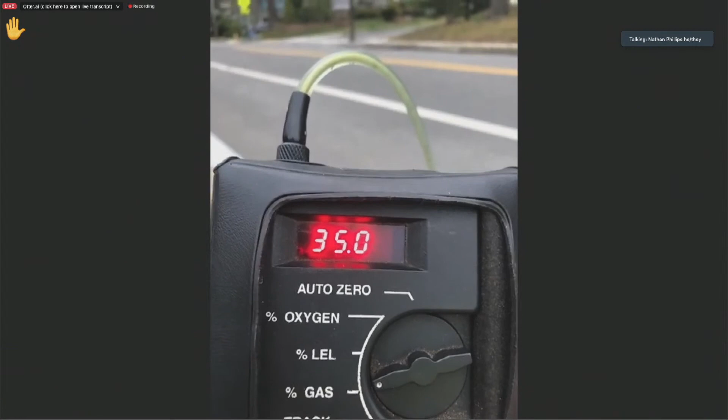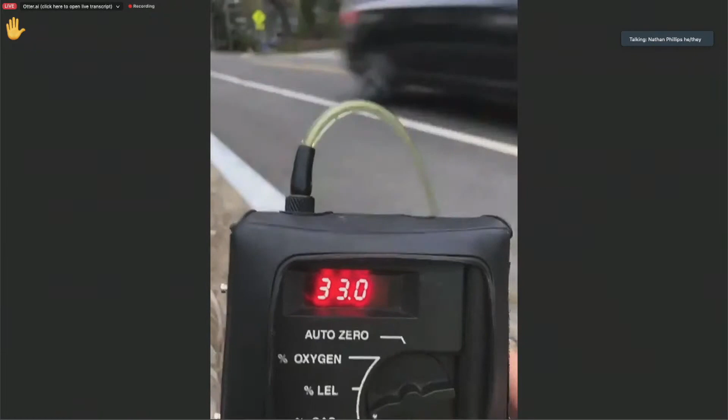So this remains a dangerous situation, and I think the priority must be on addressing a situation like this. I'm calling for a DPU investigation of the Walnut Street gas explosion, and I think our priorities need to be on safety rather than these lower priority areas that are being asked for.

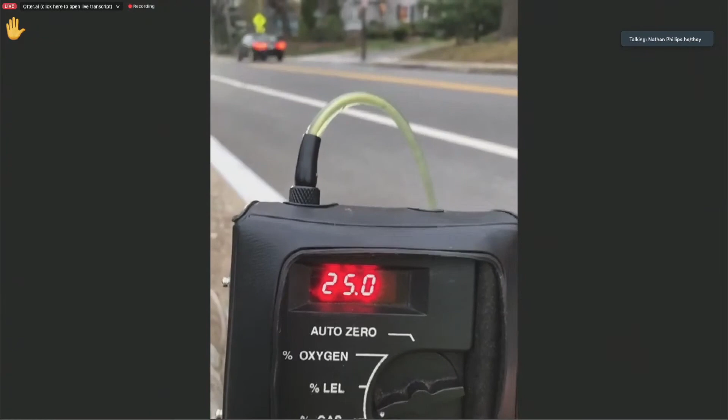Thank you very much for your comments, Mr. Phillips. I agree that Walnut Street has been a real problem. I've been out there myself several times, including with you, and there's still a lot of gas leaking out there. I am concerned about it. But right now we have a different grant of location in front of us. I have called the emergency line about Walnut Street, and when I was bicycling around today, I did see another NGrid van on site there. But thank you very much.

Yeah, and just so you know, I'm going to call this leak in right now. Okay, thank you very much. Is there any other member of the public that would like to speak?

I think we're all talked out on these grants of location. Okay, this is in Ward 8. I guess I would see if there's a motion.

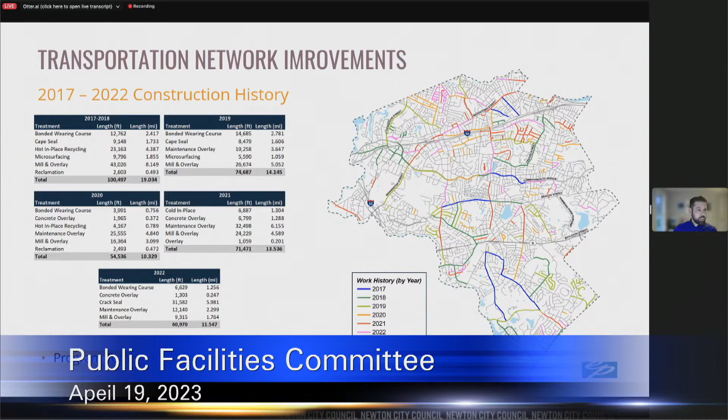In terms of the sidewalks and curb ramps, I included this history here as well. As you might remember, anytime we do any minor or major rehabilitation to a roadway, we make sure the sidewalks and curb ramps are accessible as part of that process. So far in the program, last year was a little bit of a shorter year in terms of how many sidewalk and curb ramps got done, but that tends to fluctuate year by year depending on what projects are up next for the program.

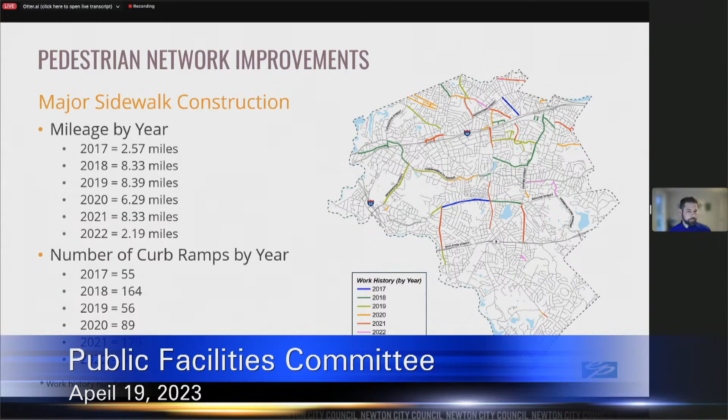Next I want to talk about something we touched on briefly at last year's update—an update on where we're at with the pedestrian infrastructure network and the inventory we recently completed. As we introduced last year, we were in the process of completing this. Mike Jasset, a city worker who helped complete the majority of this work with some training—hats off to him—spent a lot of time on the sidewalks and curb ramps in Newton collecting this information. It was all collected utilizing an existing system the city has obtained, their asset management software through People GIS.

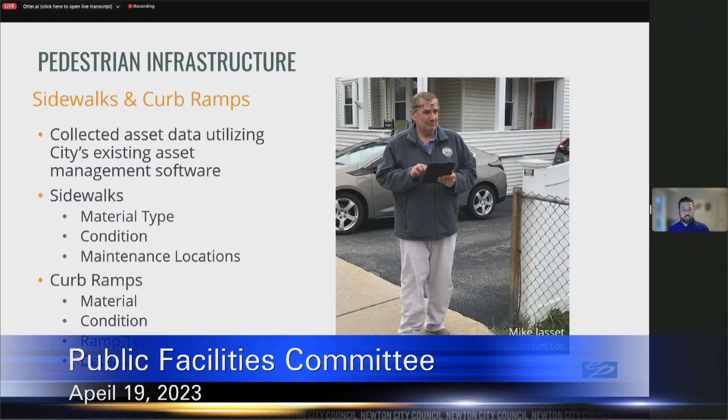Mike, with very little training and guidance, was able to collect sidewalk data including material type, condition, and maintenance locations needed to be performed. He also performed a full curb ramp inventory, collecting material type, condition of each curb ramp, the ramp type, and whether or not ramps had detectable warning panels, as that's part of ADA and AAB compliance.

He rated each of the sidewalk segments, generally broken up from intersection to intersection, using general categories: excellent, good, fair, poor, and replace. You can see some examples of those on the right-hand side of the screen.

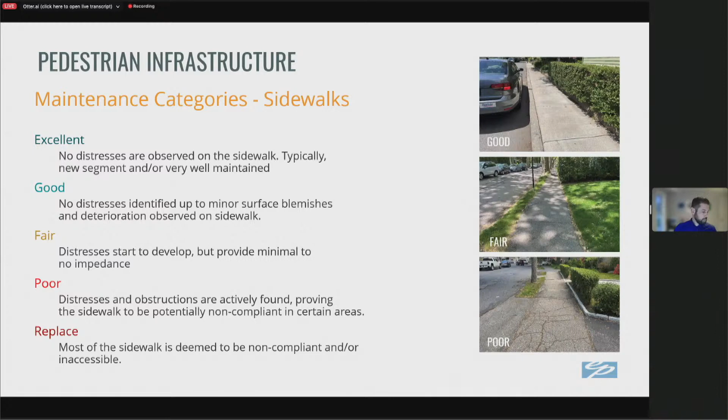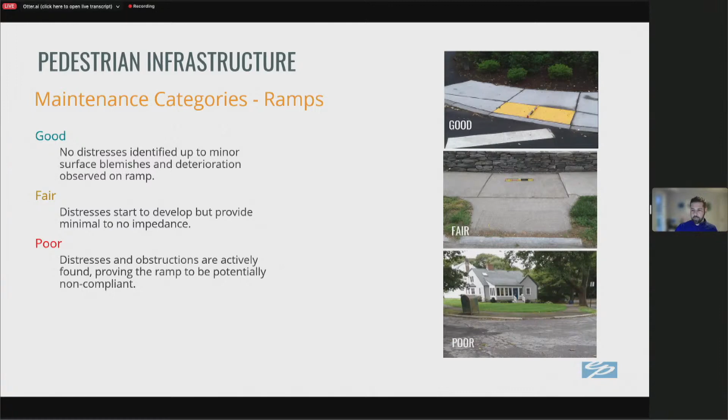We did the same thing for the curb ramps. It's a little bit different in terms of how we rate those, but it's generally on a good, fair, poor rating system for general condition.

In terms of what was collected and what the final evaluation shows, there are approximately 420 miles of sidewalk infrastructure that were mapped, and he collected that information in that rating system.

41% of the sidewalk network was found to be in excellent or good condition, 48% was in fair condition, and 11% was in poor condition. Just to give you a guide, the city's road miles total 287 miles, so there's actually quite a bit more sidewalk miles than roadway in the city, just because there's sidewalk on many of the roadways on both sides of the road.

In terms of the curb ramp inventory, he collected information on 5,200 curb ramps. This is a substantial network of sidewalks and curb ramps. Similar to the sidewalk rating, they were found to be in excellent or good condition 57% of the time, fair condition 39%, and poor condition 4%.

We also identified where potential new ramps could be added. The guidance we gave Mike when doing this inventory was to look at where sidewalks hit intersections where there was no ramp or ramp opening to access the sidewalk.

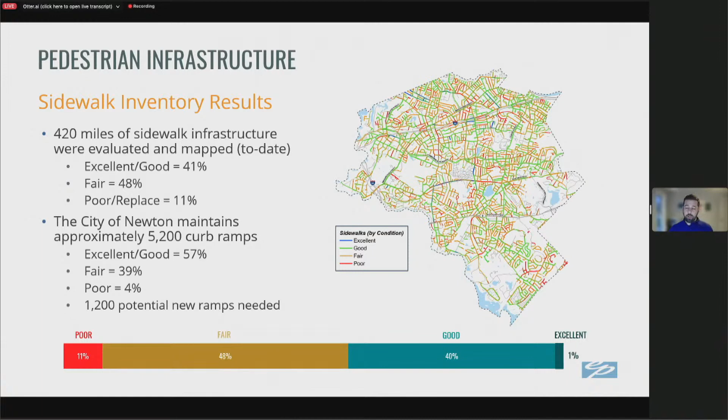In terms of moving forward on sidewalks and curb ramps, I wanted to talk about prioritization. For those of you who were on the call last year, you might remember those beautiful heat maps showing where pedestrian activity is. We're going to continue using those in the prioritization.

We're hearing loud and clear that one of the priorities in the city is around schools and the safety around schools and being able to access schools. You can see on the right-hand side here, we've created buffer maps around each of the schools. I'll show more detail about what that allows us to do moving forward in terms of prioritizing and understanding what type of work needs to be done on each school.

We also use roadway classification, since they're major connection points on minor and major arterial roadways and collectors compared to local roadways. So we're going to use that in terms of prioritization.

We're also looking at the Safe Routes to School mapping that the city currently has, specifically the previously established plow routes for sidewalks, prioritizing those as main walking points as they were identified as part of the Safe Routes to School initiative.

And obviously we're going to use a lot of the data collected by Mike in the assessment—condition data, whether or not a sidewalk or curb ramp is in compliance—and utilize those heat maps as well.

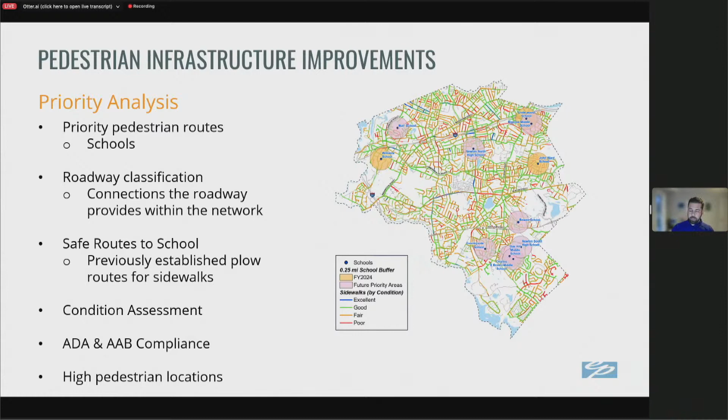With that, I'm going to show you an example of 3 of the schools. These schools were actually on the city's capital plan: Ward School, Underwood School, and Williams School.

What we did was draw buffer maps around the school—I believe they're quarter-mile buffers around each school. That gives us an understanding of where the most likely pedestrian activity is going to happen due to the school itself, logically where people are likely walking to and from school.

We have each of those for each of these schools right now. The red is the condition in terms of being in poor condition within these buffers. Yellow is sidewalk segments found to be in fair condition, and the greens are the ones in good condition. Again, we have this for both the sidewalk and the curb ramps.

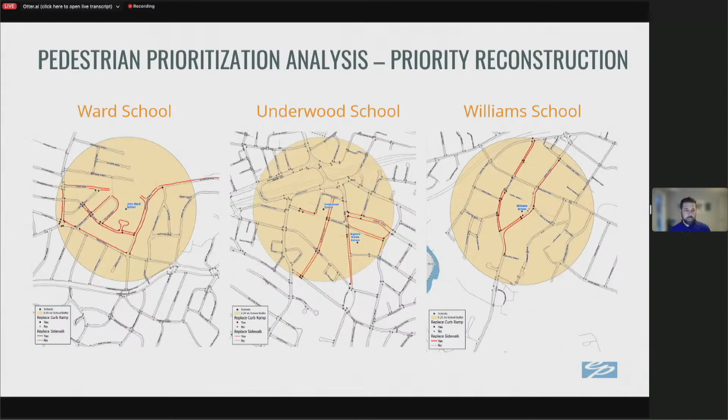Next, I'm going to give a high-level overview of where we're at with the roadway network as well. I'll be happy to go back to any of these slides or graphics if anybody has specific questions. I know many of you on this call have seen the roadway network presentation a couple times, so we brought this back a bit and added in some of the sidewalk information, to not make it too lengthy.

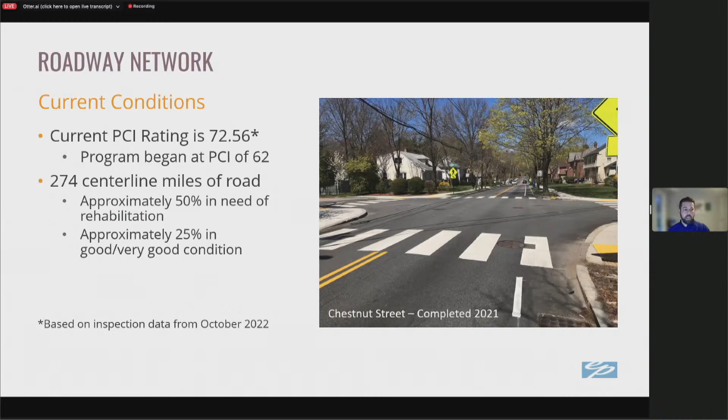The overall current PCI on the road network is 72.56. The program began, I believe, right around 62, so we're continuing to make progress there. All of the numbers I'm showing you today are based on the inspections we did this past season in October of 2022. Again, 274 centerline miles of roadway, approximately 50% are still in need of some sort of rehabilitation, and approximately 25% of the road network is actually in good or very good condition.

Just to remind everybody, the yearly process we go through doesn't just look at roadway conditions. We look at a number of different things that need to be done to each of these roadways. First, we look at the budget and distribute how much money should be allocated toward each of the different treatments, and we try to put a specific number into each category based on the roadway ratings.

Then we look at the existing conditions themselves. We take a look at the Complete Streets initiatives, does a particular street need sidewalks or ADA accessibility or bike accommodations? We look at the community needs and what needs to be done there. We also have that data-driven analysis that guides us to where we should be looking and getting the most benefit for the money we're spending. That's the cost-benefit value, a very valuable tool for us in prioritizing which roads to tackle first.

And then what always throws us for a loop every year is all the underground infrastructure and what comes up there. So we make sure the water system is in good shape, that any repairs are made ahead of time with sewer, and also other utility upgrades that are underground. We typically start this process with a kind of master list that we go off of on a yearly basis, but we usually start checking the following year's roadways for utility or Complete Streets needs in late summer, early fall of the year before construction.

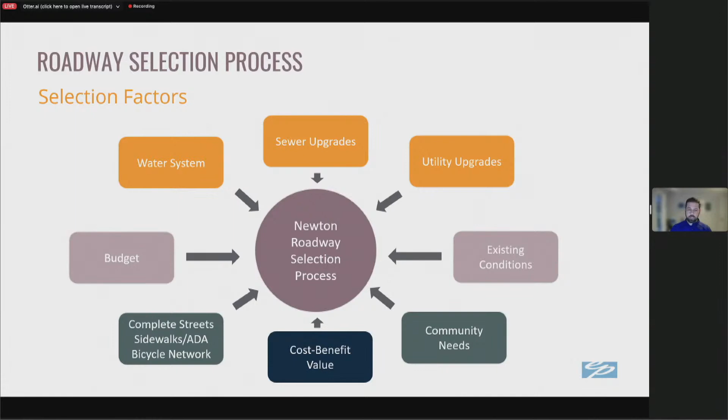That typically takes us a couple months to get through, to be able to vet all those out and make sure that we're clear to do that work in the following construction season. So in terms of the work planned for 2023, I broke this up into 3 or 4 different slides so that we can explain it.

As I like to say every year, this is a living document. Some of the underground utility work pops up as part of the planning process, and some streets can get pushed forward. That's usually the reason we have to push a street from a planned year to a future year. But we actually track that on a yearly basis to make sure we're keeping those roads on the list, even if they have to slide to the following year.

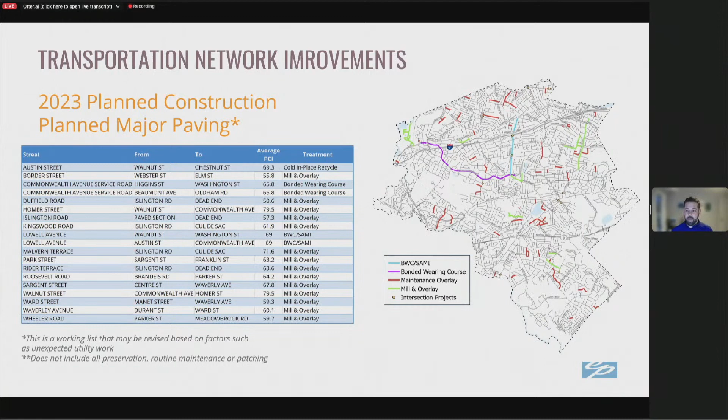The second category here is pretty substantial this year compared to past years. It's the maintenance overlays, looking at roadways that are in poor condition and making sure we're doing a curb-to-curb overlay. That's the red you see on the map on the right-hand side. Pretty substantial program this year.

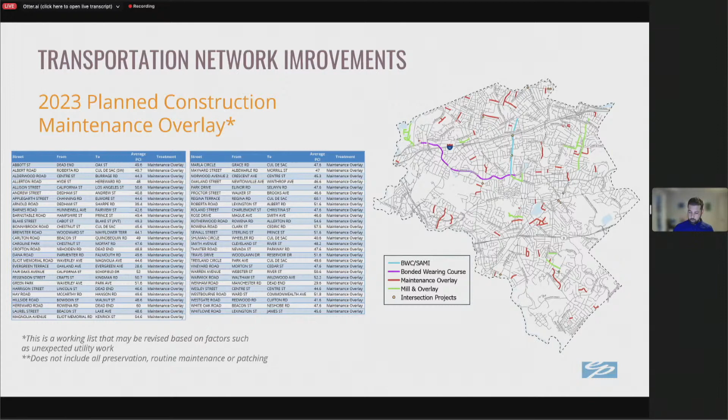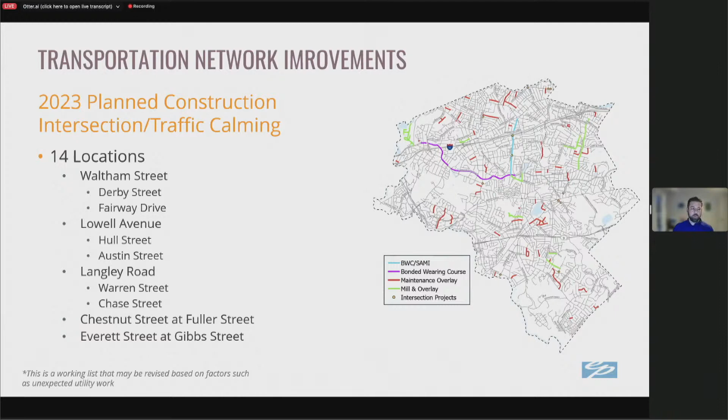And then the traffic calming locations — I listed just a few of the intersections we're planning to tackle this year. Not going to read through all of them, but it's there for your review and consumption.

In terms of an overview of what the program looks like this year, we're planning to do a lot of work, which is always a good thing, but also a challenge. It comes with its own challenges. We're looking at approximately 17 miles of roadway just off the list I provided, and usually on a year-over-year basis, crack sealing adds a substantial amount as well.

We can anticipate that this mileage is probably going to go up by somewhere between 5 and 8 miles once we add in the crack sealing, and we'll also be adding in some other preservation treatments. So it'll be a very busy year in the city, along with everything else going on, but it's good to see this program continuing to thrive and make progress.

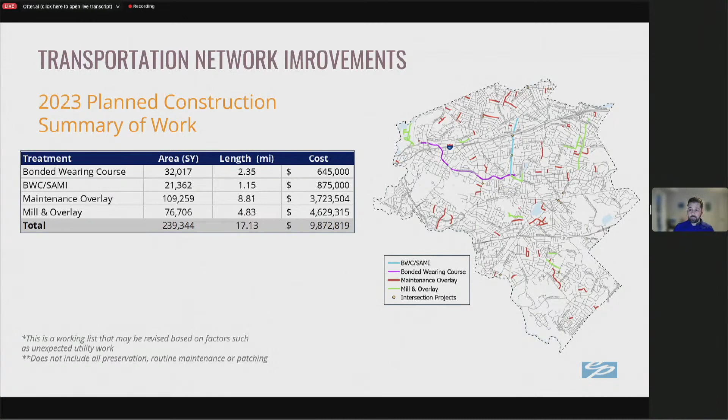The next steps — I add this every year — we're going to continue to update the database with the construction history. We just did pavement inspections last year, which we've been doing on an every-other-year cycle. This allows us to easily identify the candidates for preservation and really preserve the roadways that are in good shape so they don't fall into disrepair quickly, prolonging the life of the road network.

On a yearly basis we're going through and doing our updates of the database. We're revising our capital plan based on those different criteria I showed earlier, looking at putting out new bids and making sure we're staying current on our bids when we need to, and making sure we're getting competitive prices here in the city. I think we've done a good job of that.

This year was a substantial year for putting out new bid documents because they were not able to be renewed and they really needed to be refreshed. And then we're doing our yearly construction, making sure we're doing our QA/QC on the construction, and then we kind of go through that same cycle again.

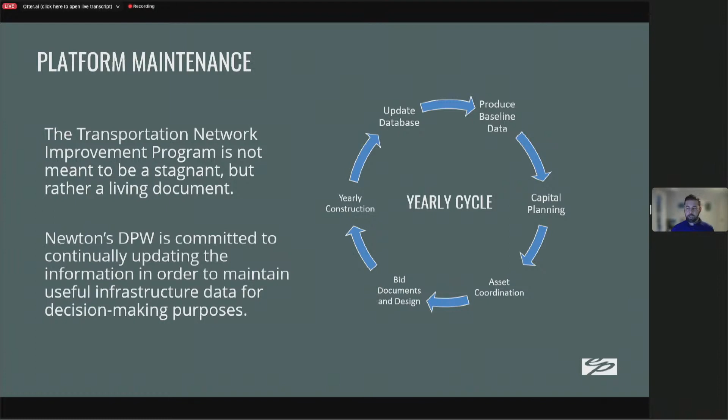It's been great to see the progress in the city. I think everybody that drives, especially the main roads in the city, can see that we're really starting to make some significant progress. Now we're starting to peck away at a lot of those neighborhood roads to make sure those are getting the treatments they deserve as well. So with that, I'll take any questions, and I can pop up the presentation at any point to go back to any slides if anybody has questions.

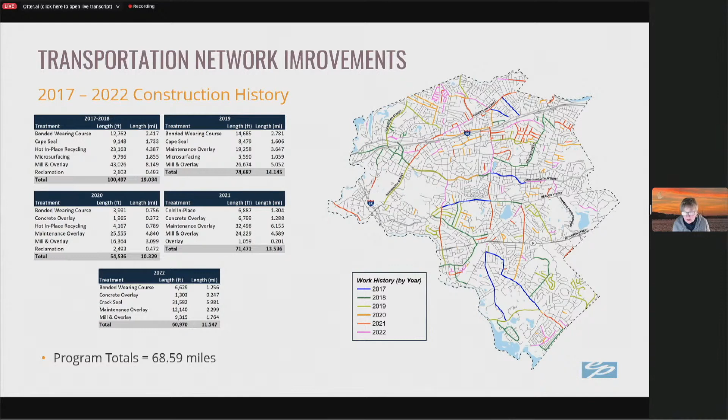I do have a sidewalk question, which I'm really pleased to see your assessment and prioritization of sidewalks. Makes a whole lot of sense to do the roads close to the schools first. Everybody here has probably noticed there's a difference in concrete colors on our sidewalks - I'm not talking about the bituminous, I'm talking about concrete with aggregate. Sometimes on some streets it's a patchwork, going from almost white to dark gray and back again, different aggregates and so forth. I understand it's possible to control that to a degree if we had a standard for the mix we were using. I wonder if you could comment on that, because it looks like, concrete then bituminous then concrete then bituminous, you get a white patch and a gray patch and a different color gray patch. I wonder if you have an approach to that, because it looks like you're going to be doing lots of little pieces of sidewalk.

Yes, thank you, Councilor. We are, and unfortunately that's really unavoidable. Unless we replace all of the concrete, it does fade, and it fades at different rates if it's in the sun more. We have a strict specification for the concrete we use - when we bid the concrete, it has to meet that specification, and we do test it on occasion to ensure it meets that spec. But if you're not replacing all the concrete in kind at the same time, you will have that difference in coloration.

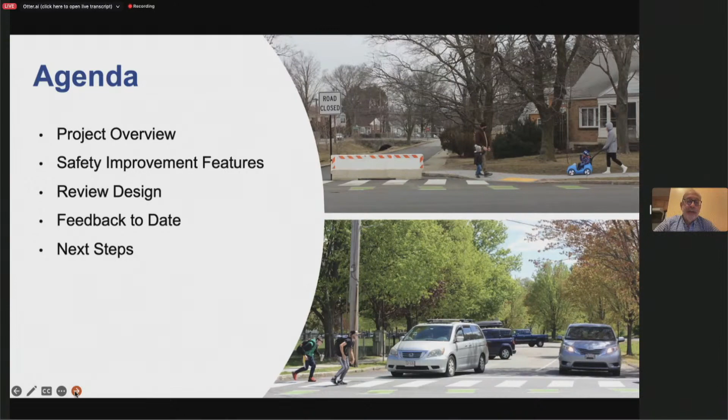Tonight we'll be talking about an overview of the project, some of the important safety features, reviewing the design, discussing the feedback we received to date, particularly over the past few weeks, and some next steps for this project. This is founded on Newton in Motion, the vision from our transportation plan, which prioritizes safety, smart, using data, accessibility for all, livable, to enhance the quality of life in the city, and sustainable, recognizing the importance of transportation to addressing climate change.

The city, as was just discussed, embraces complete streets to make sure that they work for all users. Safety is the highest priority, embodied in our aggressive grant programs for safe routes to school. Equity, so that we all have good, safe access to our roadway network. Transportation is a determinant of public health, so that's critical to how we approach policies, as well as being consistent with our climate action plan.

Central to our view of transportation planning is to moderate speeds on Newton's roads. The faster people drive, the less response time they have, and the less survivable any collision with a pedestrian or bicyclist or people in another vehicle. So we're always looking for ways to get people to drive more safely in our village centers, in our neighborhoods, and on our arterial roads.

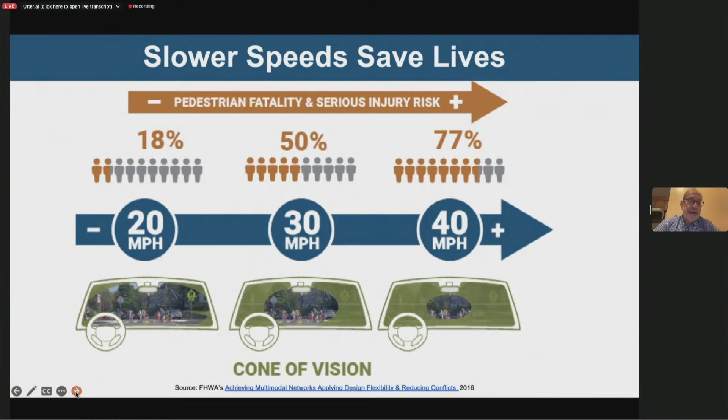This project is focused on Albemarle Road and Brookside Ave, between Washington Street and the Charles River. It is intended as a short-term pilot. There's no permanent construction planned. We're using rubber, paint, and plastic.

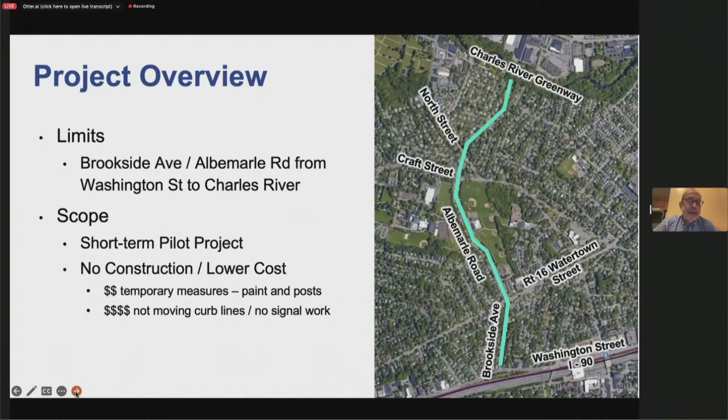These are temporary measures consistent with the state grant program through which it is funding. It would be far more costly than the $200,000 we received from MassDOT if we were moving curb lines or including signals. But we will be talking about signalization of a problematic intersection, just to inform the committee and the council.

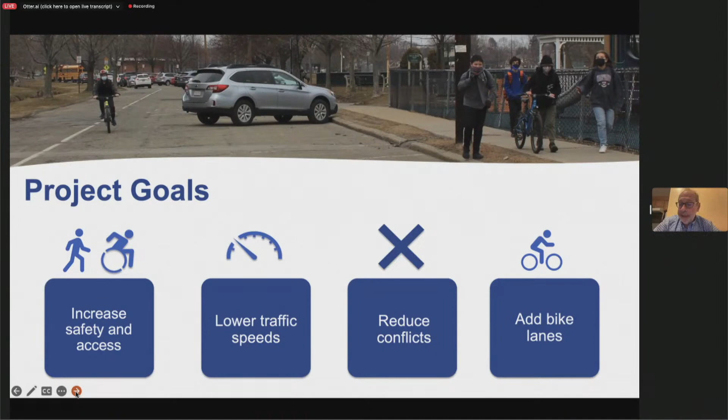Consistent with our strategy, we want to increase safety and accessibility, reduce speeds, reduce traffic conflicts, and provide facilities for cyclists and pedestrians.

To review the history of this project, a couple of years ago we developed conceptual designs. There was a public meeting in March 2022. We applied for a MassDOT Shared Streets and Spaces grant, which the council accepted last June. We've been undergoing engineering, design, and a public process through the winter and into the spring, and we hope with council's approval to have installation in August of this year.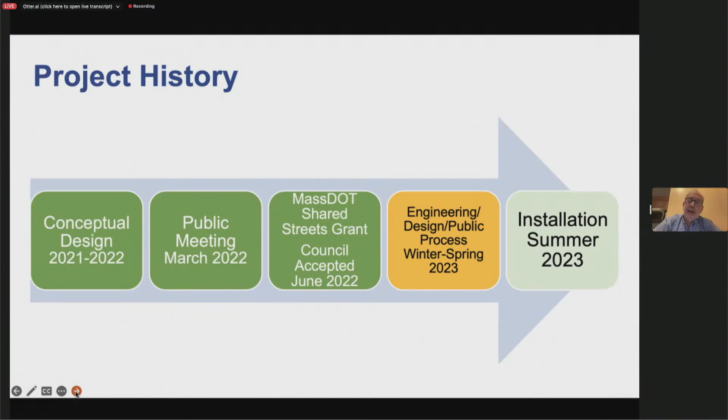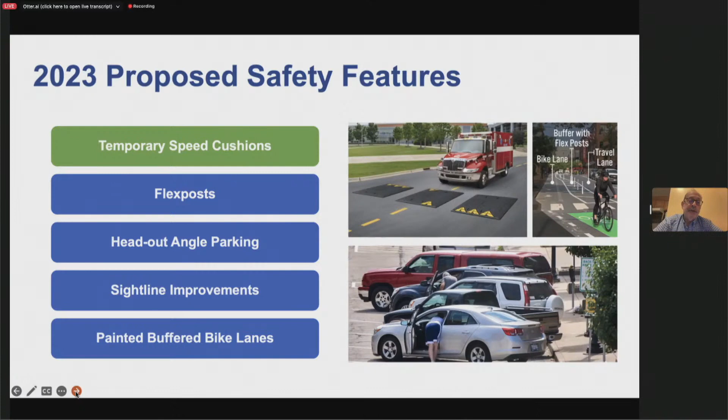The key safety features are temporary speed cushions, which, consistent with the docket item, is technically within your jurisdiction, but we're looking for your blessing for the entirety of this temporary project. Other features include flex posts, head-out angle parking - we'll talk more about that - improvements to sight lines so motorists have better visibility of other roadway users, and painted and buffered bike lanes.

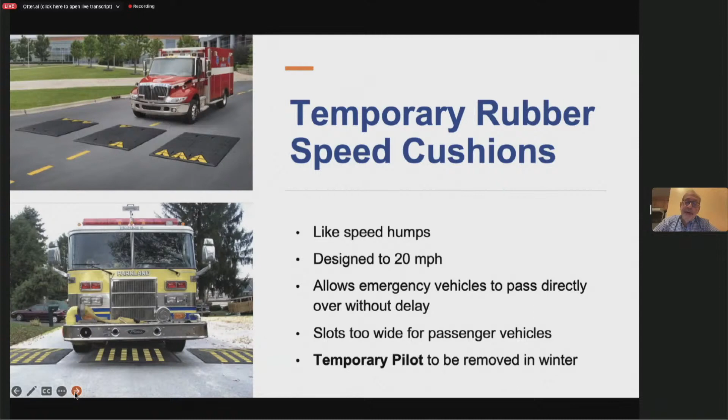The use of these temporary rubber speed cushions - they're similar to speed humps designed to 20-mile-an-hour speeds. They allow emergency vehicles to pass right over them. The slots are too wide for most passenger vehicles, and these are intended as a temporary pilot, installed about 9 months out of the year, similar to what we've done on Grant Avenue.

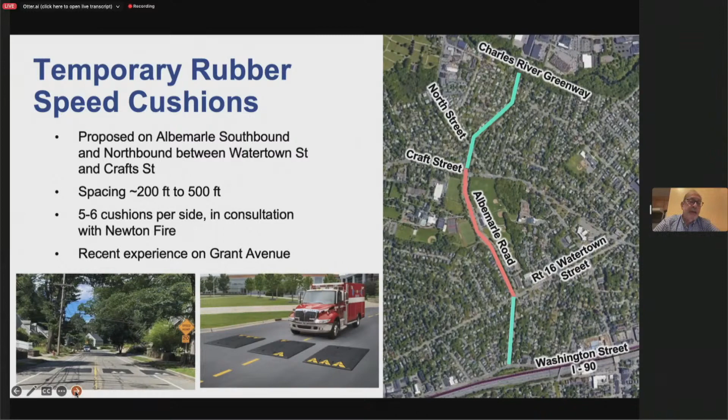They're proposed just for the middle section of this project, northbound and southbound between Watertown and Crafts, every 200 to 500 feet apart, prioritized right before crossings, about 5 or 6 cushions per side. We would be doing this in consultation with the Newton Fire Department and learning from our recent experience on Grant Avenue. This is an overhead view of the approximate locations we anticipate these being.

We may move some of them - they can make a noise when vehicles go over them. So we may remove the ones in front of houses on the bottom right of the screen on the southbound side of Albemarle. But this is just to give you a sense of what we have in mind.

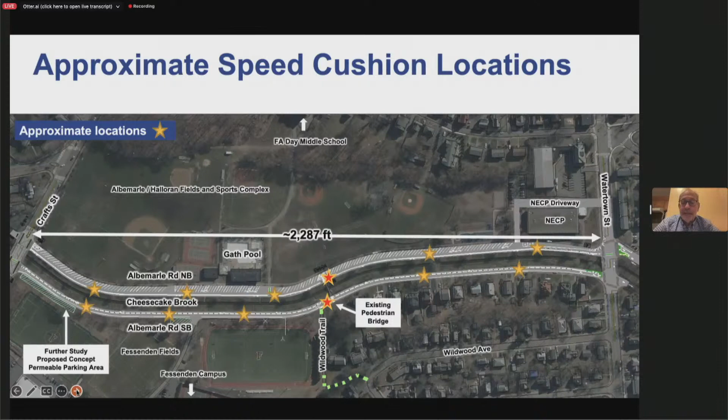Really the goal is when people are traveling on this road, we want them to be going slowly and be more mindful and prepared for particularly kids, but others in the roadway that would be crossing or riding alongside them.

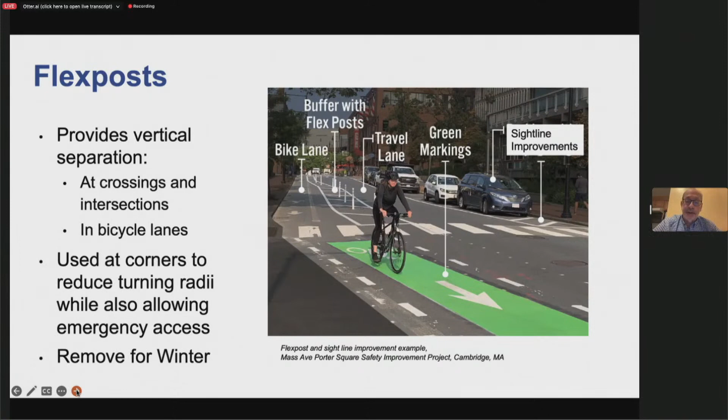Flex posts provide vertical elements that we would be installing at crossings and intersections to separate bicycle lanes and to use at corners to help reduce the turning radii. They also allow emergency vehicle access, and those will also be taken up for the winter. This illustration gives you a sense of how they're installed, but I'm sure everyone in the meeting is familiar with these elements that have been sprouting all over the region in the past few years.

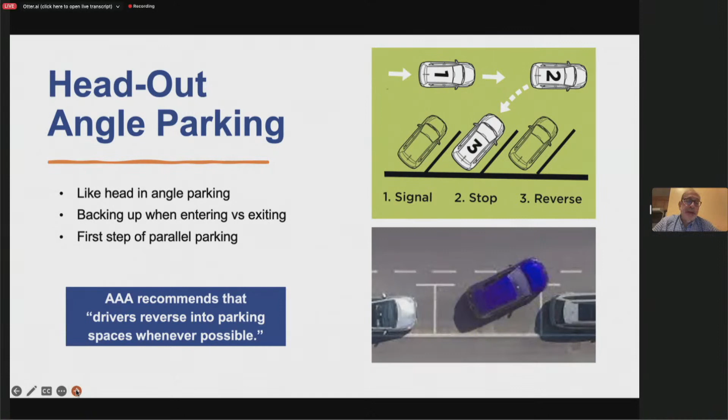The next element is head-out angle parking, which is angle parking similar to head-in, but you would back up when you're entering versus exiting. It's the first maneuver we all make when we're doing parallel parking. AAA recommends that drivers reverse into parking spaces whenever possible, and they also recommend head-out angle parking.

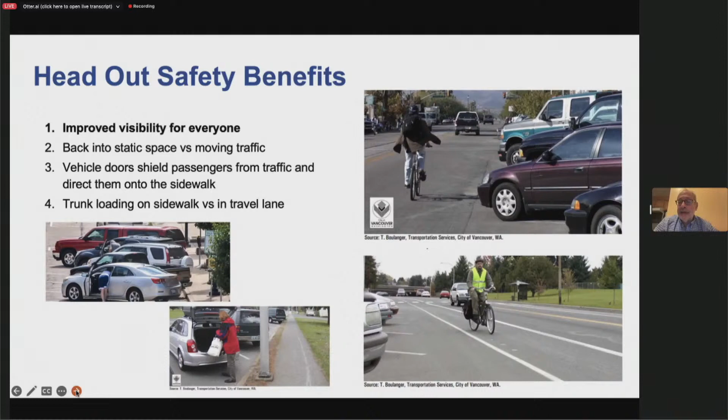The benefits of this are primarily greater visibility - you're backing up into a space versus into moving traffic. The doors shield passengers from traffic, and you can trunk load onto the sidewalk versus into a travel lane. It maintains the space efficiency of head-in angle parking, but provides important safety benefits.

Not to say Newton is the same as Tucson, Arizona, but they used to have one car and bike crash per week, and after they changed to head-out parking, they had no crashes in 4 years.

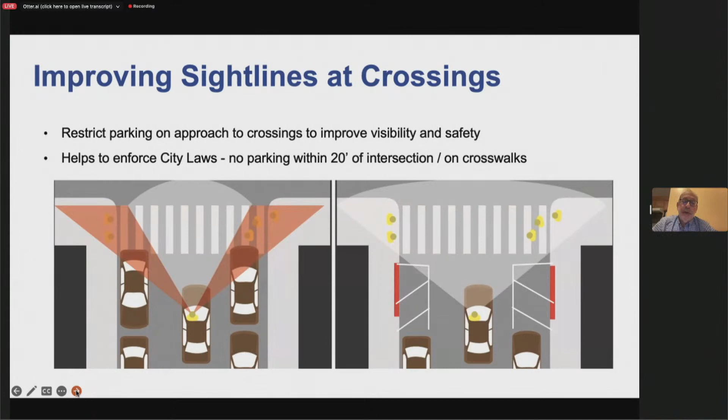The next element is to improve sightlines. Right now we have parking, notwithstanding the ordinance that prohibits parking within 20 feet of an intersection - we have parking right up against crosswalks and closer to intersections. So we want to remove that to provide greater visibility.

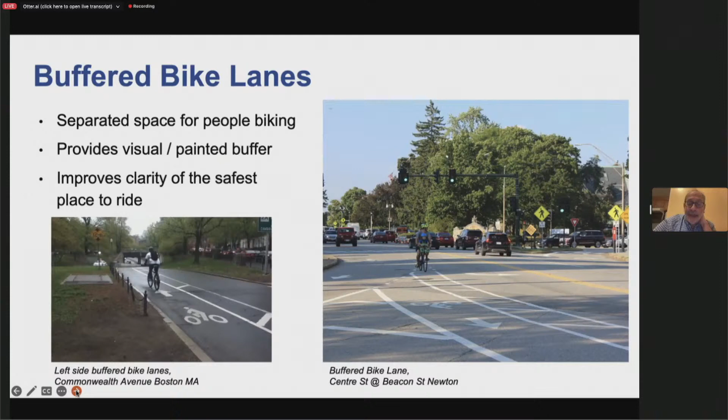Lastly, buffered bike lanes. There's sometimes some questions about terminology, but a buffered bike lane or separated bike lane means that you have just some pavement, usually demarcated with paint or thermoplastic, to separate the motor vehicle lane from the bicycle lane. That's what we're proposing for most of this project on Albemarle. It's a visual and painted buffer that gives more clarity for the safest place to ride. In a perfect world with more dimensions, we'd be looking at protected bike lanes, but there's not currently enough width to do that on Albemarle.

A slightly different approach is proposed on Brookside Avenue. We're thinking of this as a neighborhood greenway with relatively low traffic volumes. We'd have improvements at Washington Street, slowing turns with flex posts and paint at Albemarle, which comes in from the side and stops on the northbound side in terms of its name, then resumes again heading north past Watertown Street. There would also be a contraflow bike lane, so for that short section of a few hundred feet on Brookside, it would be one way for drivers and two way for cyclists.

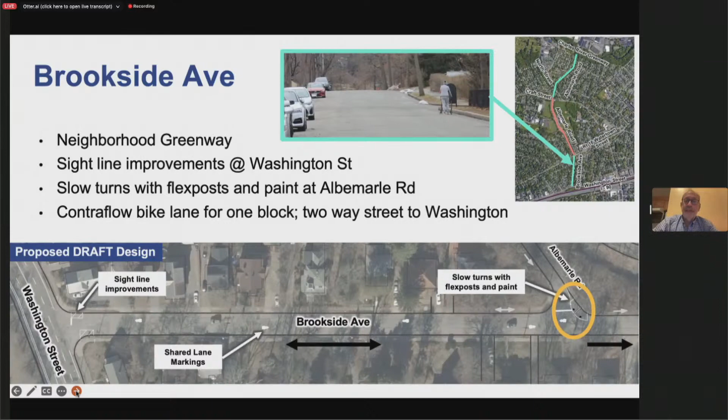This is an illustration of the intersection of Watertown and Albemarle. Brookside is the bottom right, just the way streets were named, based on which street was built first. There would be something called a bike box, that green horizontal section at the intersection where cyclists can safely wait for the light to change or to have the right of way. Something called a cross bike is like a crosswalk where cyclists are encouraged to ride to lead them into the buffered bike lane, and you can see the contraflow bike lane heading southbound on Brookside.

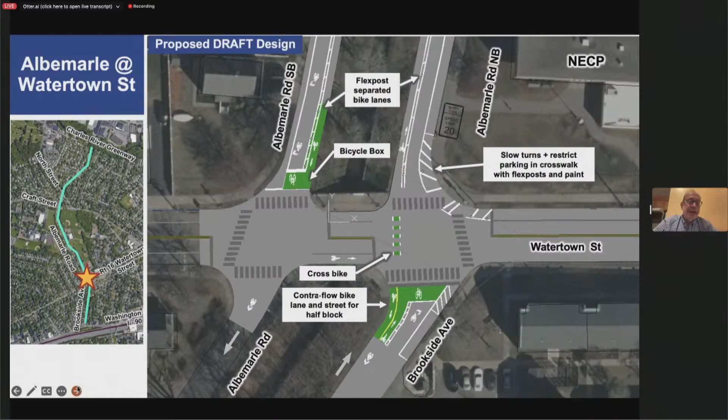As we get into Albemarle heading north, what's interesting is that during school pickup times, when the day gets out, you've got double-parked school buses blocking traffic, so traffic comes to a standstill for a few minutes in the afternoon where there's no passing. But we would provide cyclists with their own lane on the southbound side towards the left, separated at strategic locations where there are crosswalks, with speed cushions and flex posts approaching the crosswalks.

We also don't currently have sidewalks for most of Albemarle on the southbound side. So where there is a walking path across the pedestrian bridge, a few feet up the southbound side of Albemarle, and then onto Wildwood Trail heading west, there would be a painted pedestrian path.

Again, think of these as short-term improvements. This is what we're proposing to be in place for a few years.

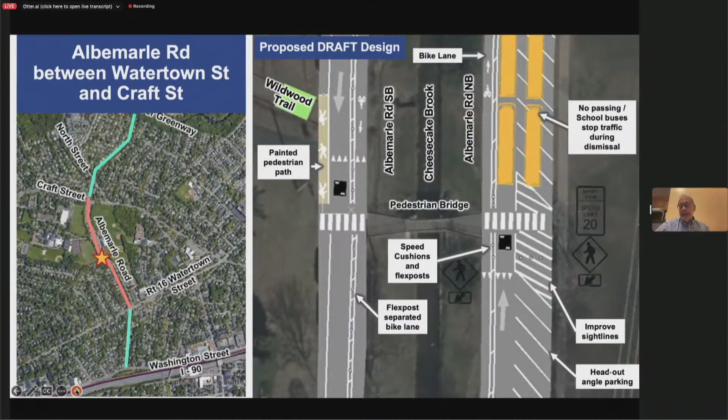Software called AutoTurn does a parking analysis. Getting back to the back-in parking, it shows that for most vehicles there would not be any incursion into the protected bike lane. This is a large truck and a Ford F-150, showing there's no interception into the bike lane, just into the buffer space in between.

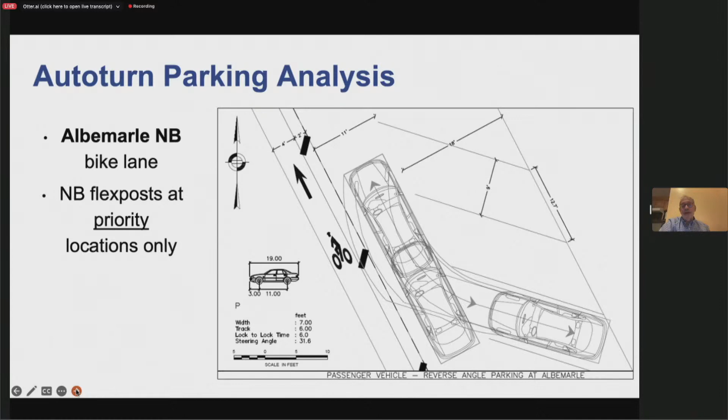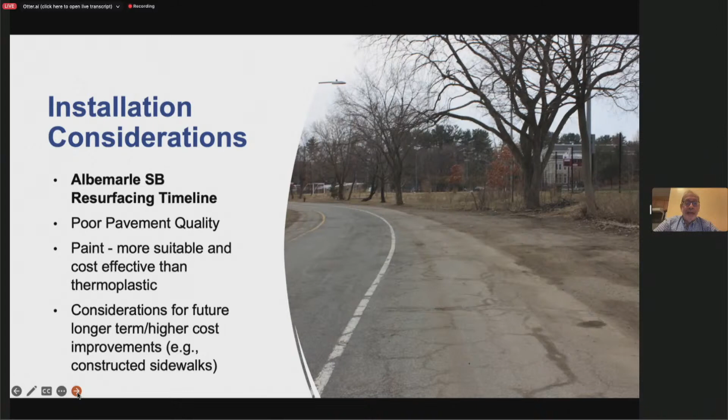Coming on the heels of the roadway improvement plan, we can see that this is a roadway that is ripe for resurfacing, as some are in Newton. This is the southbound section of Albemarle. I wouldn't personally recommend just paving it given its condition, but really looking at a redesign to provide sidewalks. There's more that can be done here, but we would definitely only be doing temporary measures on this roadway. That's why paint would be more cost effective than thermoplastic, and we'd be looking at longer term improvements in the years to come.

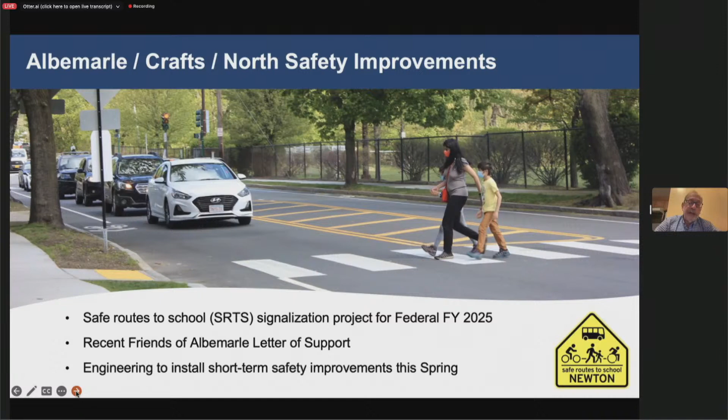So why don't I pause for a second and talk about something I'm sure you're aware of, the concern of many families and residents getting across the Albemarle and Crafts intersection. This is a high hazard area, and we were successful in securing a state grant, the Safe Routes to School grant, for signalization currently targeted for federal fiscal year 2025. We're seeking to advance that. I'm sure the members of the committee and public have seen the letter from the Friends of Albemarle urging improvements. So we've worked with our partners in engineering to look at some short-term safety improvements happening this spring.

And I wonder if I could just ask Jason to talk for a few minutes about what's proposed here.

Sure, thanks Josh, and good evening everyone. Given the focus and some of the recent crash history here at the Albemarle Crafts intersection, certainly implementing this entire plan is more than DPW Transportation Division has capacity to install in-house, and we're fortunate to have received the grant from MassDOT for the entire corridor. That said, we did want to move ahead and install some of these safety improvements at the intersection in the near term.

We've been working closely with Josh and folks in planning, as well as the consultant Neighborways. The plan is to move ahead with in-house staff to implement this portion of the plan in the near future, before the rest of the plans are finalized and we have to bid it out and have the contractor install it. These intersection improvements, pavement markings, and flex posts in the vicinity of the intersection, we are planning to implement in the coming weeks. Thank you very much, Jason.

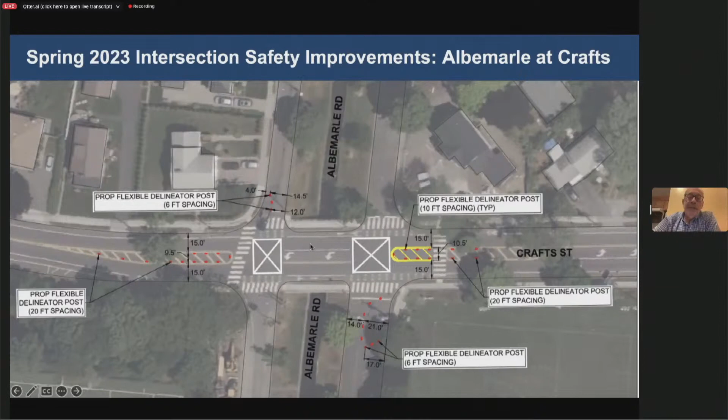This is just giving a little more detail of some of the measures we would be taking as part of this project, which is to remove a northbound lane on Albemarle as you approach Crafts, because we found that having multiple lanes is a challenge at an unsignalized intersection. A car may be on the left and someone else will come up on the right and not see that there's a pedestrian in front of the car on the left, for example. That's the kind of behavior that happens when you've got multiple lanes of traffic.

We recognize there are some consequences to this in terms of the queuing of cars heading north. Over the left, we show it in a greenish blue color. There's been discussion of potential parking near Fessenden. That's just shown because it's been discussed, but it has not been approved, and there's more work to do to move that forward.

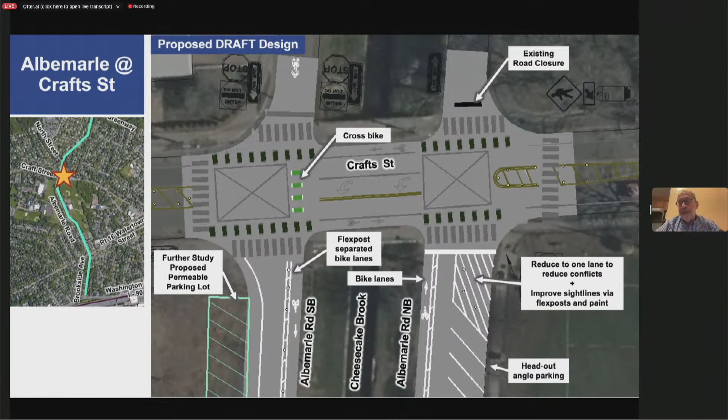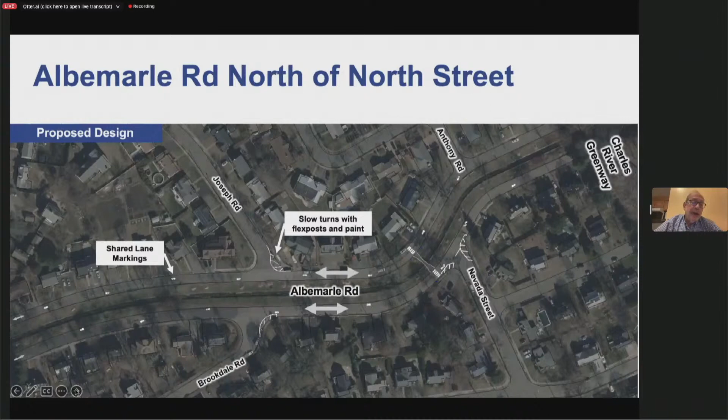By the way, we just have something like a slip lane. It's just enough for 3 or 4 cars currently on the right lane of Albemarle northbound, so it only really functions as a turning lane. North of North Street, we don't have a lot of improvements, just some painted bump outs to help slow turns, with flex posts and paint, at the intersection of Brookdale and Joseph Road and Nevada Street. And then you get up to the Charles River Greenway, but this is just about the lowest volume section of Albemarle.

So just wanted to take a moment and talk about the parking layout, what we would have here. At the corner, if we're going from right to left, south to north, and focusing on the northbound side, there would be a section of parallel parking shaded in blue, then 45-degree head-out angle parking, then a section by Gath Pool of 60-degree head-out, and then back to 45-degree head-out. What we're doing with the different angles is trying to preserve as much room as possible in the travel lanes. Where we formerly had 90-degree head-in parking, because of the length of cars, that doesn't leave any room for the bike lane we want to preserve for the length of the corridor. That's why that's changing.

We showed the existing pedestrian bridge, but as members may know, there's discussion of a new bridge, as well as many field improvements planned in this area, led by the team at PRC. I also note the further study proposed for the concept of a permeable parking area.

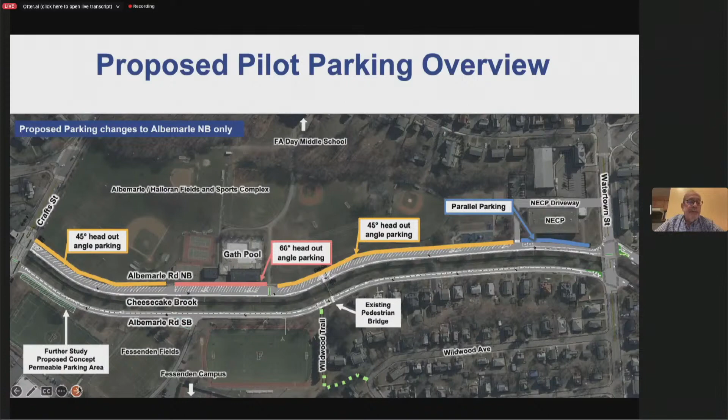Continuing with the parking discussion, what we have today is the 60-degree head-in parking or 90-degree head-in parking, shown on the left. In the middle, we show our draft design for a combination of 45 and 60-degree head-out parking, and then just an illustration of what has been discussed but not proposed and not part of this project, for angle parking on the southbound side closer to Fessenden.

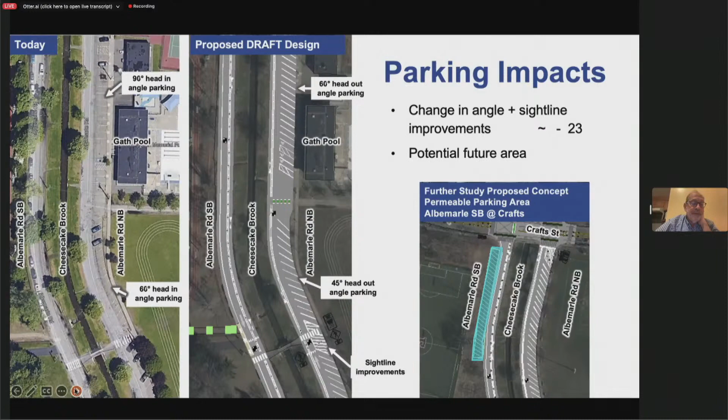There's been a lot of engagement. I've only been on the team here since the beginning of January, but over the past year plus, the team has met with many of you councilors, and we thank you for your time, folks in various city departments, the public schools, NECP, Complete Streets Working Group, Friends of Albemarle, and many other stakeholders involved with this project, whether in the neighborhood or citywide. We've had the opportunity to present, have listening sessions, present at various meetings, and have site visits, and gotten a lot of input. We probably received 75 or so comments in the past few weeks.

People are concerned about all the high volumes of vulnerable users and all the kids, as you can see if you were there when school lets in or out, or on a busy day when people are using the fields and the pool. Speeds, accessibility, safety of pedestrians and bicyclists, the nature of bus operations, intersection safety is a big concern. People are concerned about parking, and we've also gotten input about environmental preservation. Cheesecake Brook is not much of a brook now; it's channelized, it serves as drainage, but it doesn't function the way a waterway should. People are interested in placemaking and art, which is beyond the scope of this particular grant.

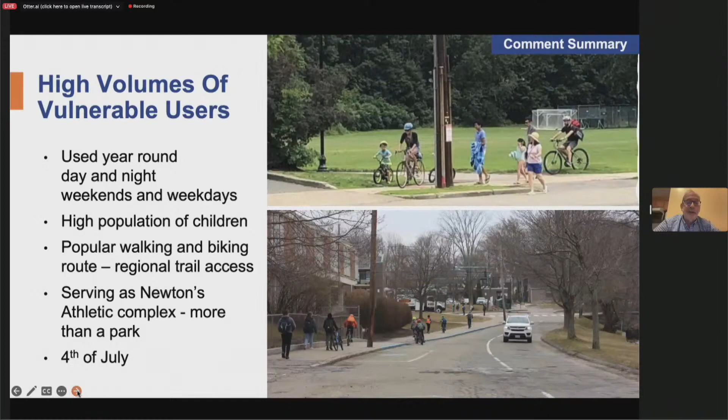Albemarle is used year-round, day and night, all times of the day. Lots of kids, very popular for walking and biking. It's really at the heart of the city's athletic complex, so it's much more than a park. It's been closed in the past on the 4th of July, as I'm sure you all know.

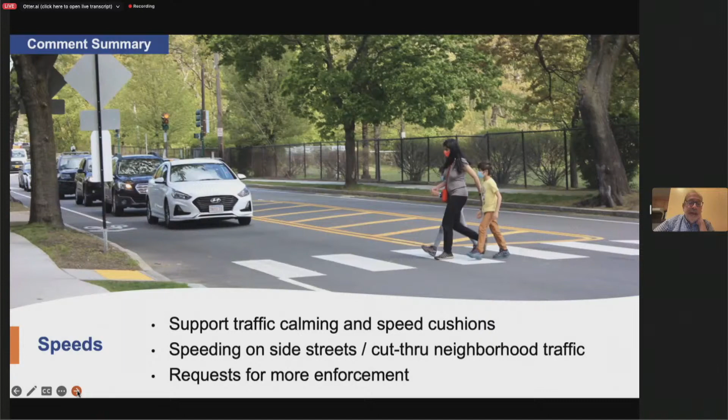So our approach to speeding is welcome. People talk about their support for traffic calming. They like the idea of speed cushions. There's concern about speeding on side streets and cutting through the neighborhood, and people are looking for more enforcement about speeding and weight limits.

Pedestrian safety is an issue. I mentioned the lack of a southbound sidewalk, so it's not uncommon for folks to be walking in the road. We do need sidewalks there. I've spoken directly to parents who would ordinarily have their kids walking or biking, but have to drive them because of concerns about safety.

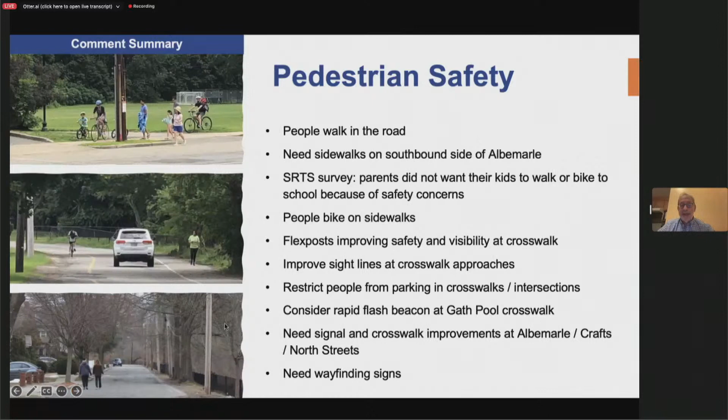A lot of those concerns are focused on the Albemarle and Crafts intersection, but they're concerned about Albemarle as well. Because there's no assigned place for people to bike, they will tend to do so on sidewalks. People are appreciative of the idea of flex posts, greater sight lines, removing the ability for people to park in crosswalks, maybe installing a rapid flash beacon at the Gath Pool crosswalk, which could complement what we're proposing here, and the need for signal and crosswalk improvements at the intersections, and also a desire for wayfinding signs.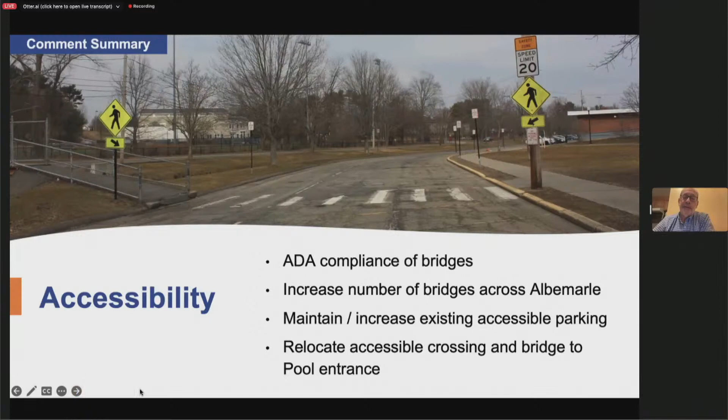The bridges are generally not accessible, especially the one that washed away. So people are looking for more ways to cross Albemarle, to maintain or increase the accessible parking that's there, and maybe look at relocating the accessible crossing and the bridge closer to the pool entrance.

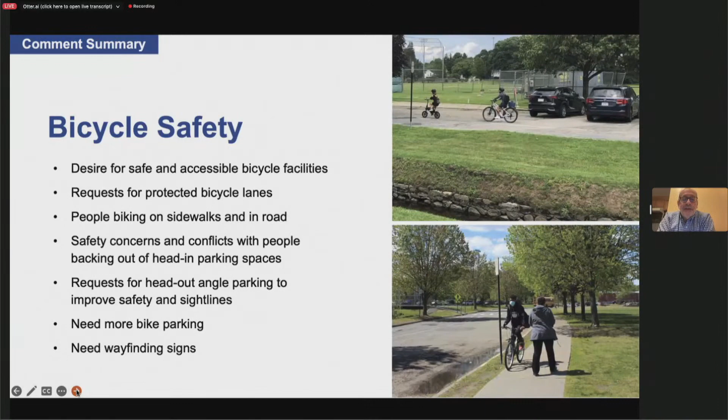We've heard a lot from cyclists who just want safety and accessibility citywide, but certainly here. People appreciate the opportunity for a protected bike lane, although it would not technically be protected, just buffered. And just concerns about the conflicts, whether it's because of people backing out of the head-in parking spaces or lack of defined space on the roadway.

Looking for more bike parking and, again, wayfinding signs. Bus operations aren't something that we're really specifically able to address within this grant, but the behavior of kids and drivers around buses is important. Having better sight lines at crosswalks will be helpful. Formalizing the bus pickup and drop off is outside the scope of this project.

So there's a lot of conflicts, a lot of turnover with parking, particularly when people are picking up or dropping off their kids for athletic events. There's a lack of parking—we'll talk about some solutions for that in a minute. Because the brook side of the road, both northbound and southbound, has so-called country drainage, there's no curb. There's a lot of erosion of the shoulder when people park there, particularly on the southbound side.

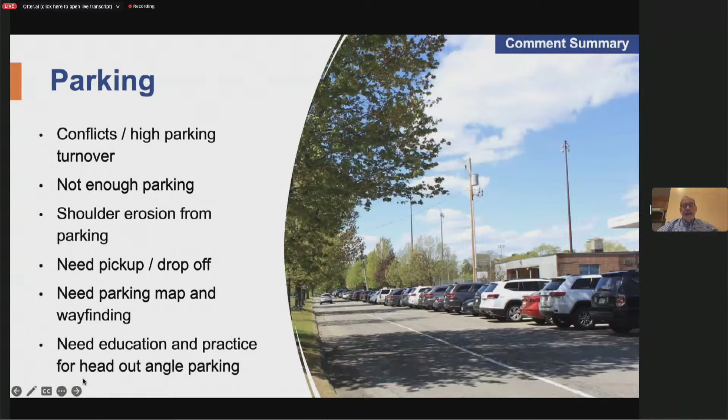So having designated areas for pickup and drop off would be helpful. A parking map and wayfinding is important, and folks have asked for education and practice for head-out angle parking. We'll talk about that as well.

So intersection safety is outside some of the scope of this, although we are looking for better paint improvements and flex posts in order to reduce the turns so that people aren't right up against the sidewalk. The northbound traffic forming multiple lanes at peak hours creates conflict points, so that's the reason to reduce Albemarle to one lane and eliminate the turning lane.

But we've heard concerns about that as well. People are concerned about what that might mean for traffic volumes. And then at various sections of the roadway, it's closed heading northbound, so people generally appreciate that. That has not been the subject of a lot of conflict.

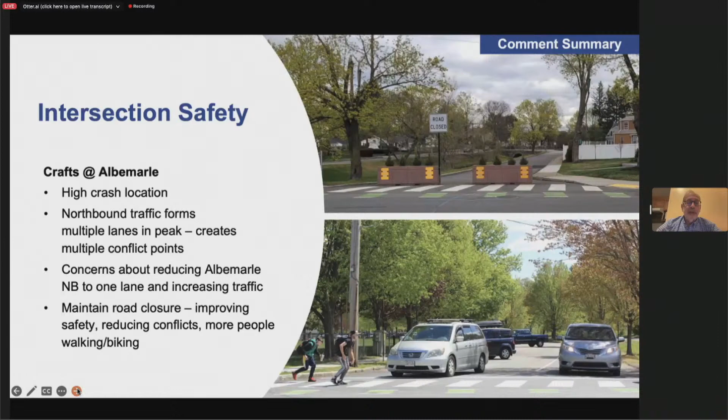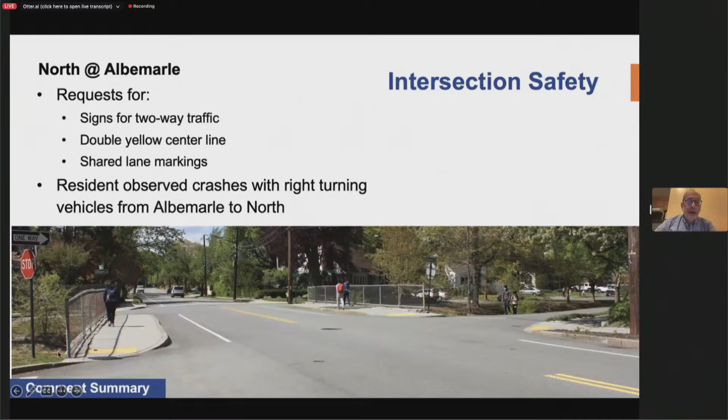We've gotten input where people are looking for better indication of where their signs are for two-way traffic. As you know, in the northern sections, there are two-way streets on both sides of Albemarle. Having double yellow center lines would be beneficial in these areas, and shared lane markings where it's shared with bikes and cars. We've heard from folks who have actually witnessed crashes with right turning vehicles from Albemarle to North.

Also not within our scope, but there is concern about erosion of the banks from parking on the shoulders. Maybe there's an opportunity to reform this and turn it from a ditch to a waterway that people can truly celebrate and enjoy.

There are concerns about flooding and runoff. Of course, the bridge that was destroyed by a storm some time ago was indicative of that. We don't have ways to recharge the aquifer—we're just taking stormwater right from the road and dumping it into the Charles with minimal, if any, filtration.

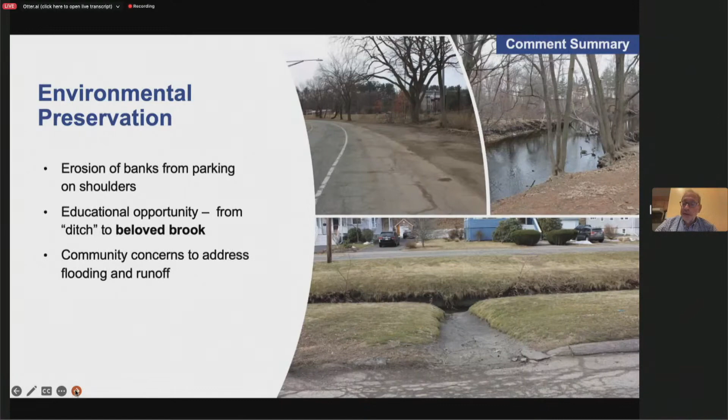Well beyond the scope, but helpful for us to be thinking about, is what people want to make this a better sense of place—whether it's rain gardens, water fountains, murals, educational kiosks and signs. Just sharing this to know that when you ask people what they want, you get a lot of feedback.

I'm really excited about this aspect because we're asking people to do some things they aren't normally accustomed to, whether it's sharing a road with a new bike lane, speed humps, or most significantly from the feedback so far, the idea of head-out parking. So we're planning events this summer to promote and practice it.

We want to make this something that people gain confidence in so that they can do it comfortably when they're in a hurry, with a series of videos sharing all the options for where people can park legally on public streets nearby. There are hundreds of spaces nearby.

Within a 5-minute walk, there's over 1,500 spaces. So if people want to go to an event but don't want to do head-out parking, they'll have many options to do that, and we will include that in our communications effort.

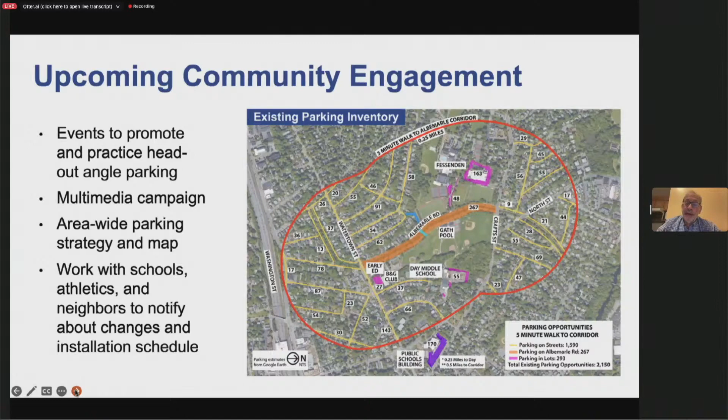We're working with schools, athletics, and neighbors to notify people about the changes and the installation schedule, which we anticipate in August. Just today, I had an email exchange with a colleague who's VP for Public Affairs with AAA Southern New England—head-out angle parking is something they support, and she'd be very interested in participating in an event with us to help familiarize people with this idea and communicate with their members. So I hope to continue conversations with that.

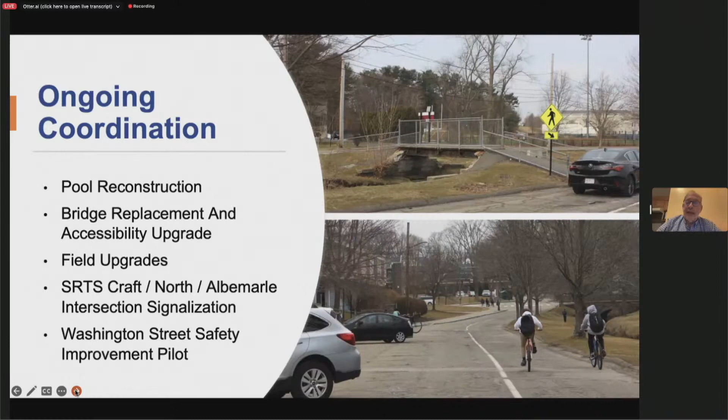As I mentioned, Albemarle has a lot of activity and much more to come, in addition to the pool reconstruction, bridge replacement, accessibility improvements, upgrades to fields, and signalization of intersections we talked about earlier. We're also working on plans to improve safety and accessibility on Washington Street. This is really looked at as, while a short-term project, it implicates many long-term initiatives of the city.

So the next steps are to finalize design based on all the feedback we've received. We'll be going before the Traffic Council for approvals on some project elements next month. We hope to go out to bid in June, continuing our education and engagement up to and after installation, which we hope to have in August of this year.

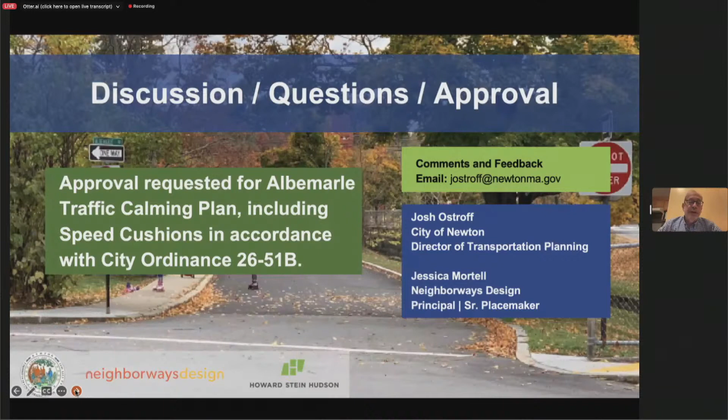So we are asking approval of the plan as it is, including speed cushions in accordance with city ordinance 26-51B. I'll stop sharing for the moment, but we'll be glad to show any slides people may have questions about. I know I went on for a long time—sorry about that, but really appreciate your attention and hope to earn your support.

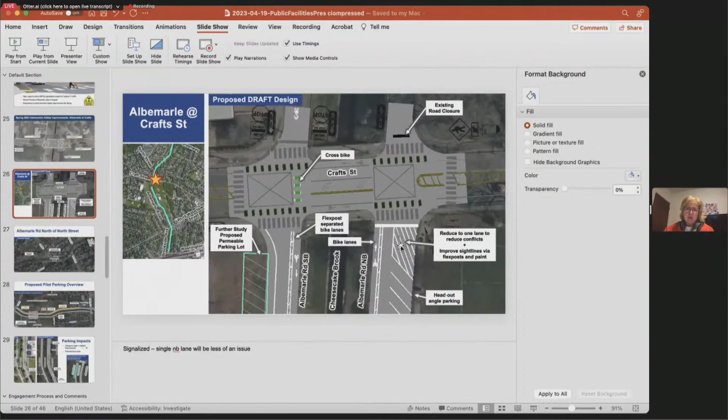Right in here, you can't really see them. Thank you so much. Okay, yeah, I couldn't see them. Thank you very much—not the first time Jason Sobel has saved me.